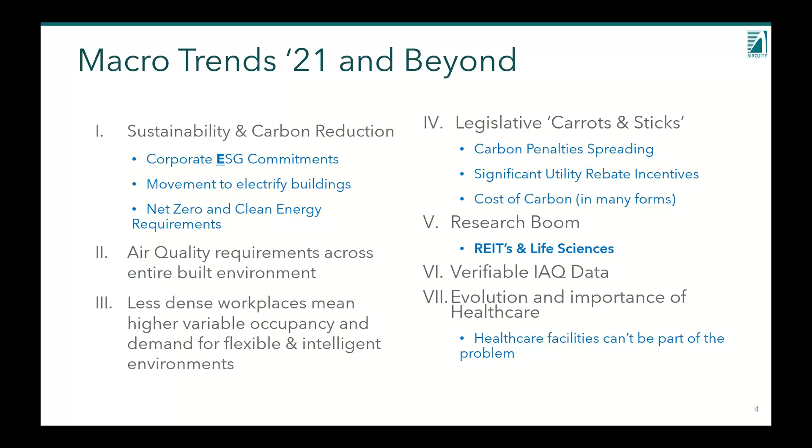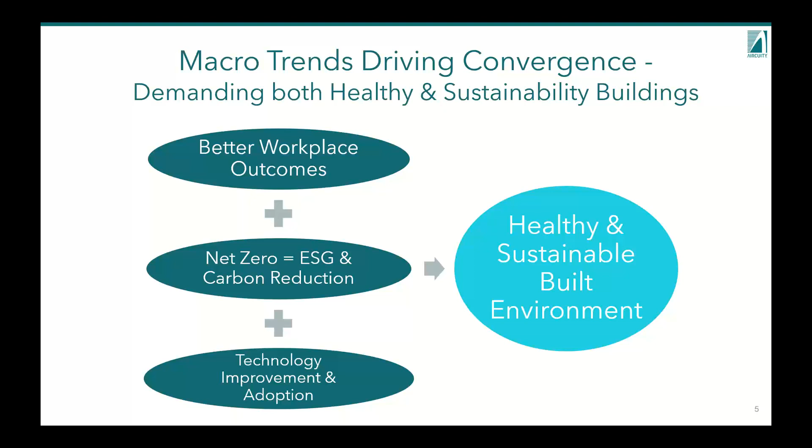So these trends really support the rest of what we're going to talk about in this presentation today. And what all that looks like, in a condensed format, is really a requirement for better workplace outcomes in terms of health, productivity, and wellness, plus being able to do that in a net zero, ESG carbon neutral environment, and then the emergence of new technology adopted to the built environment to meet the requirement of healthy and sustainable buildings, schools, workplaces, and research spaces, because all of them are just as equally important and focused on this.

So what does this look like in action? This is going to drive, and it already is starting to drive, a significant transformation in the built environment. And the one thing it's most akin to is probably electrification of cars. There was a report about 3 or 4 years ago that the combustion engine was going to be around till 2085, and the most recent report is that it will be gone completely in the mid 2030s. You're seeing, obviously on marketing and on the road, that transformation happened much more rapidly.

I think the same thing is going to be happening to the built environment. Net zero is going to become a requirement, and we're going to have to do that through adopting these new technologies. I remain extremely bullish on this front, really positive, because we've personally been involved in dozens of net zero projects around the world, and we've seen these buildings operate for a long period of time and do so very successfully. So we know the technology is there, we know the engineering and ability to do this is there, and it's really just about much wider adoption of these proven concepts and technologies.

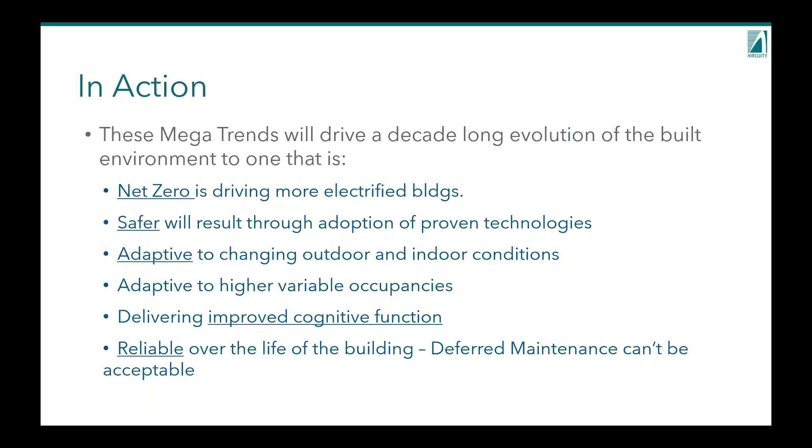The last bullet here is you just really need to make these buildings reliable over the life of the building. As we know, buildings don't go anywhere. They're often there for 50 to 80 years, and we can't allow deferred maintenance with these new technologies to be acceptable if they're also going to provide the health and wellness that they're now being required to.

So a couple of these concepts, like what is it about net zero? Well, if you include embedded carbon with the materials and such, it's in the mid-30s percent of all emissions that result, but 28% of them are just from the operations of buildings. So the world, meaning government, independent organizations, all sorts of different bodies and entities, are looking at the built environment as a major contributor to carbon emissions and something that absolutely has to be tackled.

HVAC and ventilation, as I said earlier, make up the vast majority of this. You're heating, you're cooling, and you're moving air through buildings. And if it's a 100% outside air environment like a lab or an OR, that can be as high as 60 to 70% of the total energy usage, depending on that building type.

One of the best results from managing ventilation more effectively is the mitigation of reheat. In many retrofit projects we see reheat almost completely go away, because you're not overcooling a space, supplying 55-degree supply air and then trying to reheat it back up for temperature. When you reduce the volume of air and manage it more effectively, you can really eliminate, not always entirely, but dramatically decrease the amount of reheat used in these buildings.

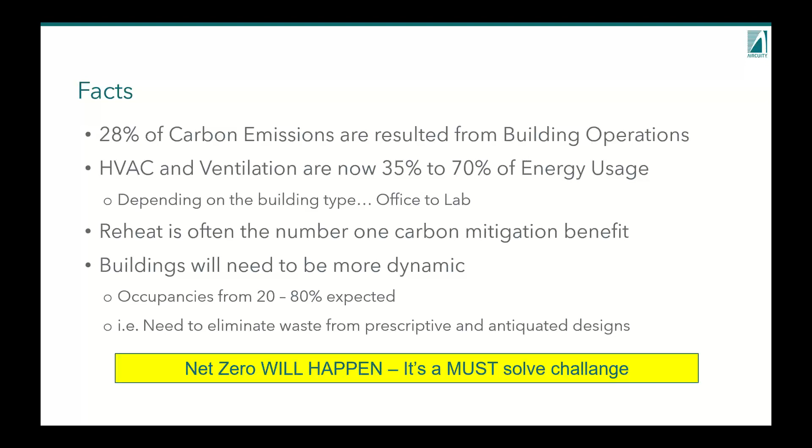So these two things go hand in hand, and it's extremely important to look at them as a total system, not just as an individual ECM or facility improvement measure. And then lastly, building occupancy and ventilation is going to be critical to manage, because occupancy is going to be much more variable with this hybrid work world we're migrating to, and in some industries that's here to stay. This is a must-solve challenge for our industry, and it's why I started by saying I think it's a really exciting time. I think it's going to be a lot of work, and we should all feel good about tackling these new challenges.

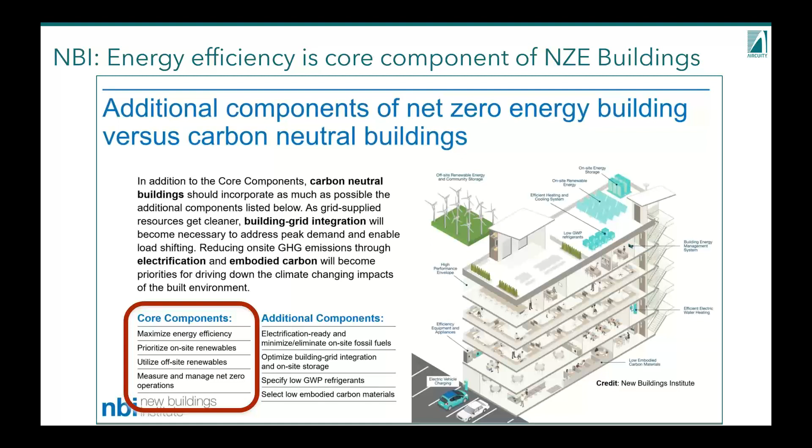Hopefully, because of ESG pressures, more of our organizations will put the proper resources toward tackling these challenges. As I mentioned, energy efficiency is a core component of net zero buildings. This is from the New Buildings Institute, and it really talks about maximizing energy efficiency first and foremost, prioritizing your on-site renewables, utilizing off-site renewables, and then measuring and managing to net zero operations.

Again, this concept of making buildings more intelligent and smarter so the systems can be maintained reliably over the life of the building, giving you the results of a healthy and safe environment—this is going to be an ongoing and very important concept. Moving to the health of the environment, the World Health Organization just published a report, and we've got connections to it on our website. It's being talked about a lot more. The key point of the next couple of slides is that the cost-effect studies were originally focused on CO2, and obviously the carbon reduction movement is about reducing carbon.

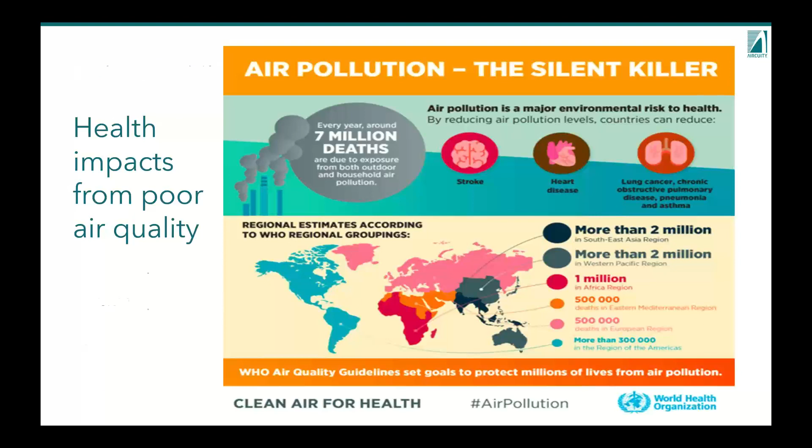But we're now also really seeing, both from COVID and this report, that small particles have a major impact on our health, and it's a very pervasive problem, both outdoors and indoors, that needs to be measured and managed more effectively going forward. We're very happy to see WHO and other organizations like IWBI get standards in place about what good indoor air quality looks like, and what level of small particles—this is 2.5 microns.

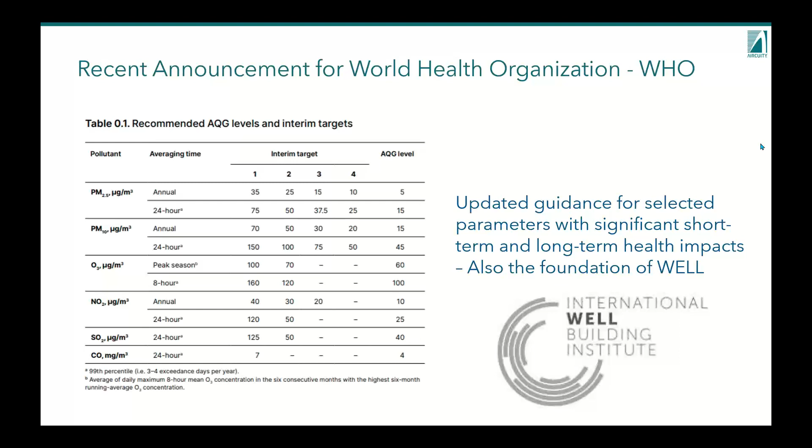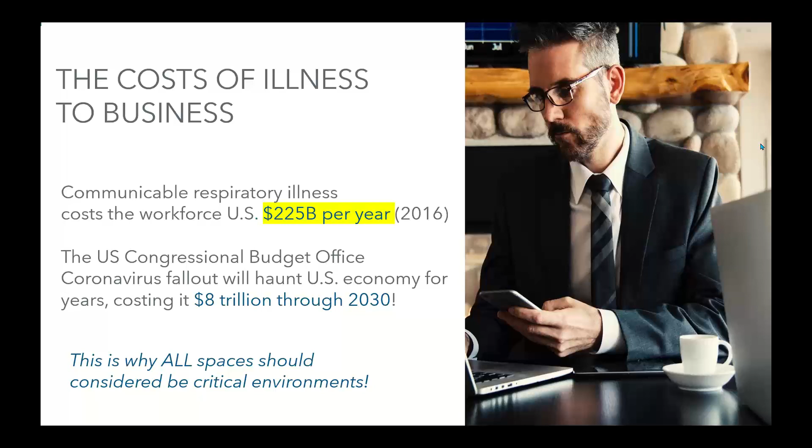Buildings are being cleaned more often. We all need to make sure our buildings are healthy, not just from a particle and CO2 perspective, but also from a harmful gases standpoint. This cost is real, and it's what's driving this movement. I think we all know this intuitively now after what happened with COVID—when buildings are part of the problem and not the solution, they're not safe places to go, and the cost is absolutely astronomical to the economy and to the organizations we all live and work in.

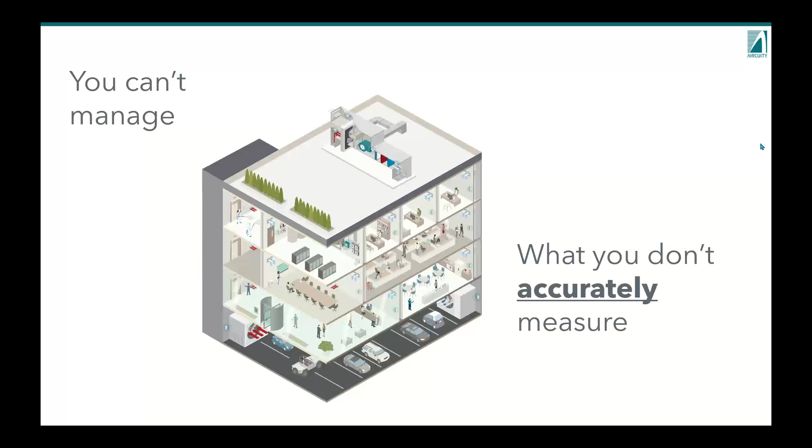So with that—this is a saying we have, but I think it's just as true in life and good engineering—you can't manage what you don't accurately measure. I think that's an important concept to get across. It's always been a challenge in the built environment, especially with things like TVOCs or particulates, which aren't traditional measurements done very well in the building automation industry—stuff we've been doing for quite a long time.

You're also seeing a lot of our customers finding this: outdoor air conditions are changing, unfortunately, right before our eyes. We all witnessed the fires in Europe, the fires in Australia—seems like one or two a year now on the West Coast, and a lot of those are now spreading across the country. We had customers in the Midwest and even on the East Coast calling, asking about particulate measurements outside that spiked from fires all the way out in Washington State.

We're seeing really more customers wanting to understand what air they're actually bringing in, and then how effective their air handling units and filtration strategies and maybe other air cleaning strategies are working. If you don't accurately measure that, you don't know where your baseline is or how effectively you're doing that.

The last part of this is an emerging and evolving field that we've experienced quite a bit over our history: when you look at indoor air quality, it goes well beyond facilities typically. We have environmental health and safety, infectious control, animal care professionals, researchers, PIs - principal investigators - all sorts of people wanting to understand and get access to air quality data. Many times they want easier, more digestible data and analytics for what they're concerned about: what was the level of particles in this space, how long did it last, did it get cleaned out - all those kind of things. So we try to provide that.

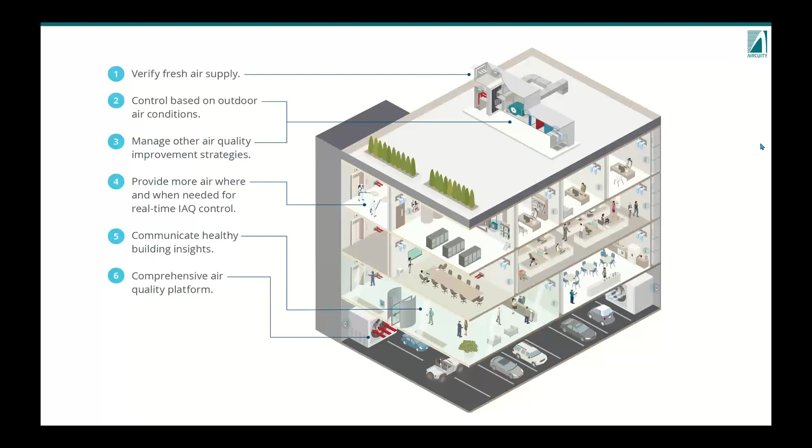So you're seeing more air quality data more pervasively displayed and utilized in the built environment.

I'll go quickly through this - we have a lot of information on our website. This is the commercial part of the presentation, but I've been at Aircuity for a long time. I came here because I believe in the concept, having come from the building automation industry.

The idea was to accurately measure indoor air quality and dynamically control ventilation to optimize both energy efficiency and health, wellness and safety. It's often misconstrued - most times we're actually providing more air where and when needed when there's an event. It beats a prescriptive approach because you're getting more efficient when you don't need all that air, and you're getting much better safety and performance of the system when you do need it. You also get all the analytics from the system that can help you with fault detection diagnostics, fixing problems much more quickly and accurately.

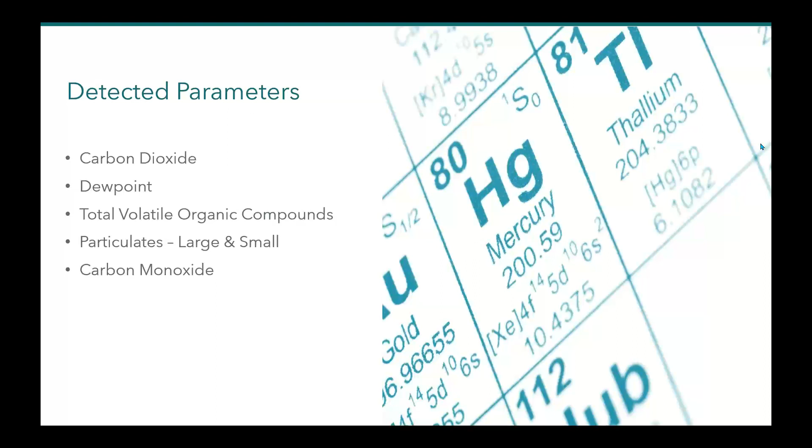So the platform measures carbon dioxide, dew point, TVOCs - total volatile organic compounds. We do that through two methods: one, which is a much more industrial grade approach, is a photoionization detector. We look at particulates, large and small, and we go all the way down to 0.3, and we're going to be improving even on that in the coming year. And then obviously carbon monoxide as well.

The platform looks like this - it's a multiplex sampling platform. What you should know is that this allows us to do this very accurately, very cost effectively over the life of the building. If you look at a life cycle cost approach, this is going to win hands down compared to calibrating and maintaining those types of sensors out in your space, which most people can't effectively do over time. So this is a life cycle cost solution approach.

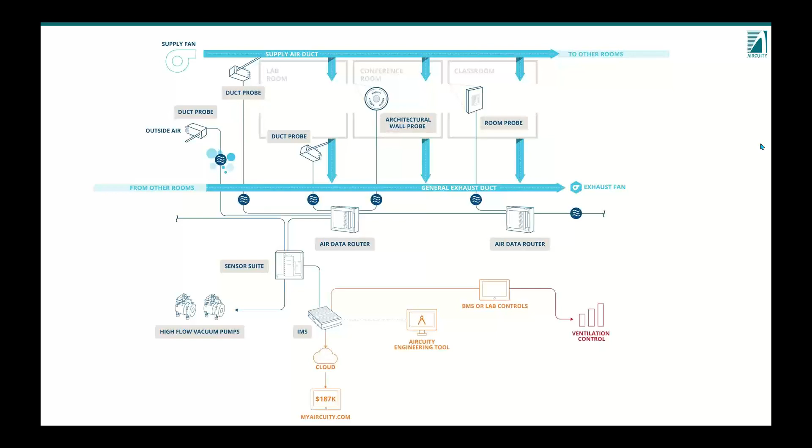And then we actually take that data, report it to the cloud for repurposing to all those constituents I mentioned earlier, and we also integrate that to the building automation system for dynamic control.

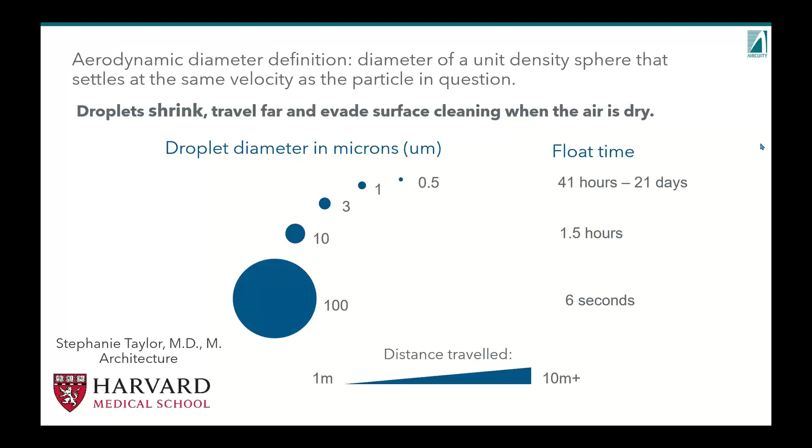So the lessons we've learned are that particulates are very important. This is a slide from Dr. Stephanie Taylor, who's a distinguished ASHRAE lecturer - you may have had her speak at APA previously or at local regionals. She's an incredible presenter with a lot of data and experience on the effects of humidity and what happens to small particles and how long they last in the air at different humidity levels, and why it's so important to mitigate the amount of them in the space. What you find typically is that in this 40 to 60 range - she calls it 40 to 60 RH on her website - you see how much healthier and more effective the built environment is.

Now, knowing full well, as many of you do, that humidity is one of the most challenging things to control and manage in the built environment, I think with this knowledge it's really about knowing. We're not drawing a line in the sand saying you must maintain these levels and go to great expense to do so. It's really about knowing this dynamic and how we begin to change control strategies, balance occupancy levels, and all sorts of things we're talking to customers about - when you may have extreme dry periods like in the winter, and or high infection times or periods.

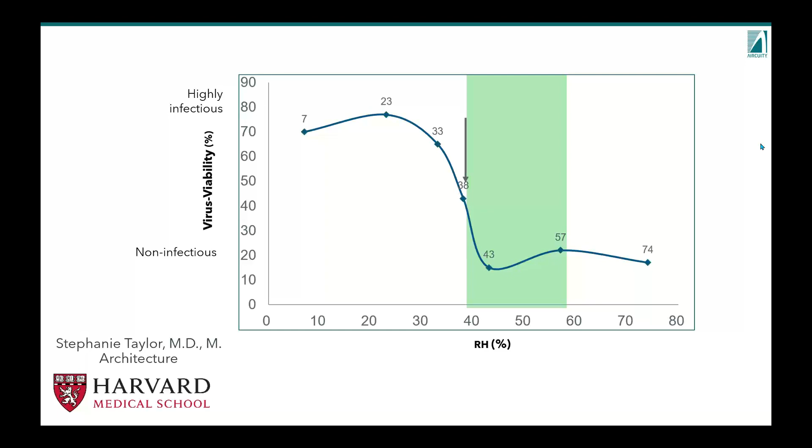So this is just relative humidity, and particulates are certainly a big part of what we learned from the whole COVID experience. The other thing we learned was filtration effectiveness is absolutely important.

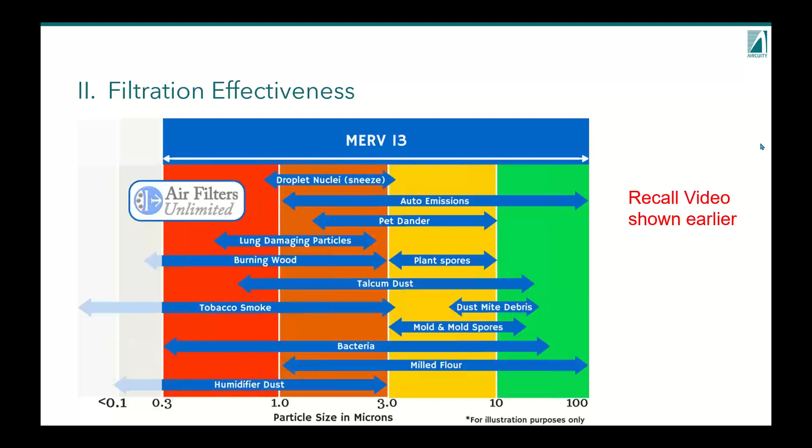ASHRAE and most of our customers have gone to increase to MERV 13 and above. One benefit of dynamically controlling ventilation is that as you increase filtration, you also affect your differential pressure. So to make that as efficient as possible, you want to balance that increased pressure with demand control ventilation, getting a much more efficient system overall while getting much better filtration effectiveness.

For a lot of our customers, we're also doing particulate measurement where all Aircuity systems have an outside air reference. Because we do differential measurement, we compare that to the supply air, the room air, etc. We really want to know what's coming into the building. We want to see if they have return air, what's coming back, and how effective that supply air is looking.

This is really where, if you're accurately measuring this, you'll know how effective your system is working. Is there filter bypass? Did you get a massive improvement when you upgraded filters? Can you change your filters based on actual performance versus time-based schedules? We've got customers doing all of the above.

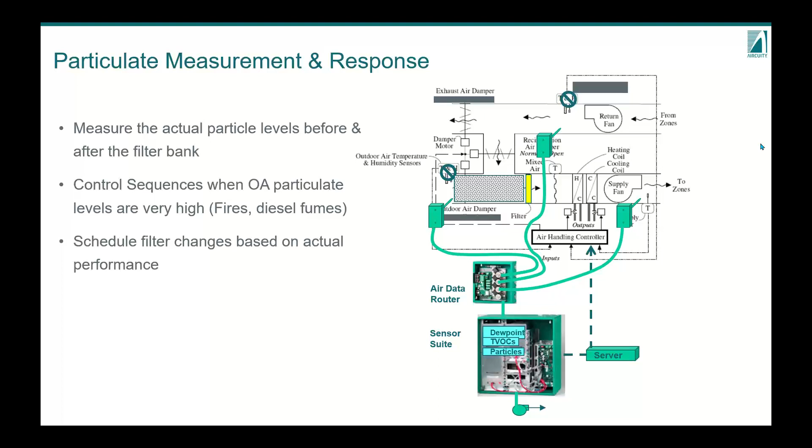It's really important to do this because we see a lot of project data where somebody might see a spike in a room, but that could be coming in through your actual system, through the supply air. So do you want to increase ventilation when the problem is actually in the outside air? This is a very good reason for establishing a system and control strategy, which is what Aircuity implements, really identifying where these problems exist and controlling for that.

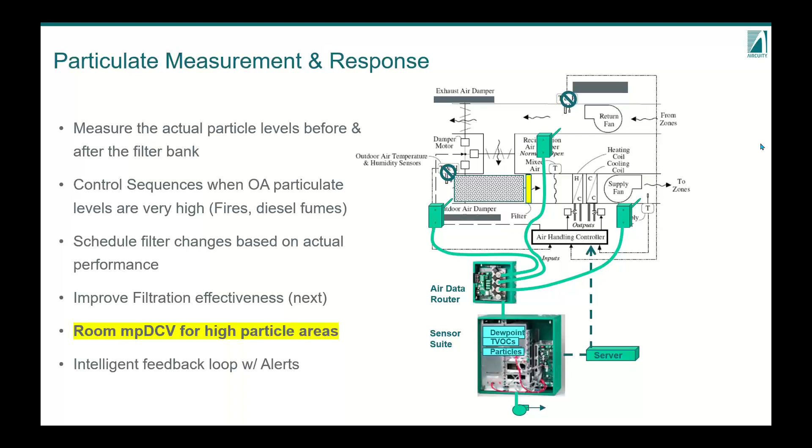That's where we build in intelligent feedback and alerts for customers. So the challenges that remain for us: relative humidity is going to continue to be interesting, and we'll have to evolve to more cost effectively and better control for that.

Are these other air quality improvement strategies and technologies that we're going to be deploying actually working? When and where do we provide more ventilation? And how effective is everything we're doing from a strategy perspective to provide healthy, safe working environments actually working?

The last point on this slide is something we've been saying for two years now, coming from the critical environment spaces. We know the strategies that work, and we know we can achieve both energy efficiency and much safer environments. One of our clients, University of California, Irvine, has just reported they have almost twofold the lowest health safety incidents in the entire UC system, and they've been implementing smart labs for over 13 years.

By education, it's not just an Aircuity thing or managing ventilation, it's really a cultural effort to want to know the data, understand how the systems are performing, implement these technologies, and watch them work over a long period of time. The energy performance characteristics are incredible, but the impact and cost benefit for health and safety is absolutely off the charts for them.

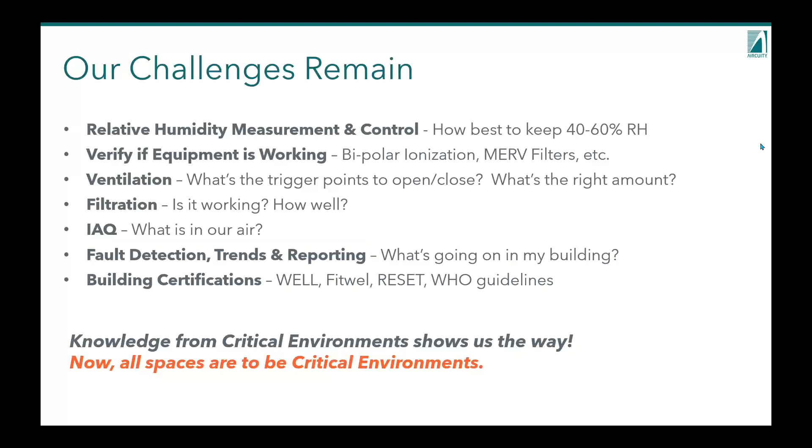If we begin to think about all spaces in critical environments and implement these technologies, it can be done, and done cost effectively, even in a net zero environment, providing healthy and safe conditions all the way down to our schools for kids.

UCI is a great case study. They set out to reduce their energy by 50% across 17 lab buildings. They actually achieved 61% energy reduction, and they've estimated total savings to the campus to be over $100 million over the life of this period. That's not energy cost only, that's energy, diversity savings, and sizing of equipment.

They totalized all of the gains they've got from this Smart Labs program. They were honored by the DOE, and they've since educated probably 500 to 1,000 customers around the globe on what they've been able to accomplish there. Phil, I was there on day one, and I feel very privileged to have watched that success story.

And so when you see that project, let's get out of this slide here. Yeah, oh boy, click on it again.

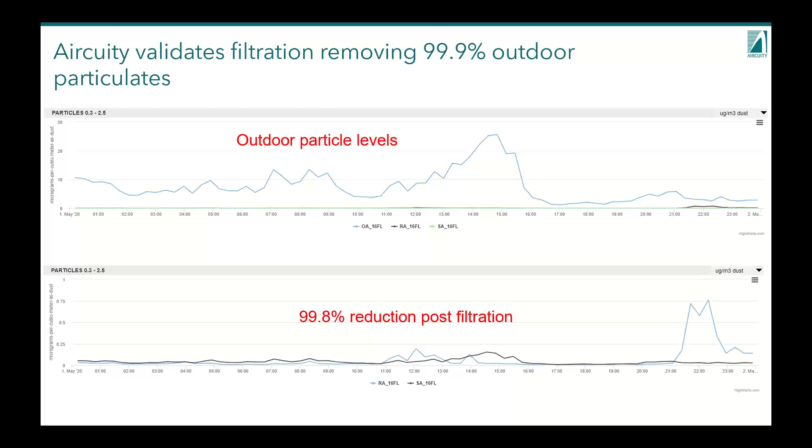And at the end of the day, they also look at that example I was giving you earlier about carefully looking at outside air particles, because they are in New York City and it can be higher there, and how effective their filtration is actually working, and are they managing to the levels they want to. This particular project was well under a 2-year payback.

One of the cornerstones of all these projects, that hopefully resonates with everyone on this call, is that this customer was able to take a project that had a really good rate of return, also get a new control system, a new exhaust fan, rebalance the building, and also recommission all the systems in the building. All turned into about a $7.2 million project, well under 2-year payback, and in this case, a very significant utility rebate incentive.

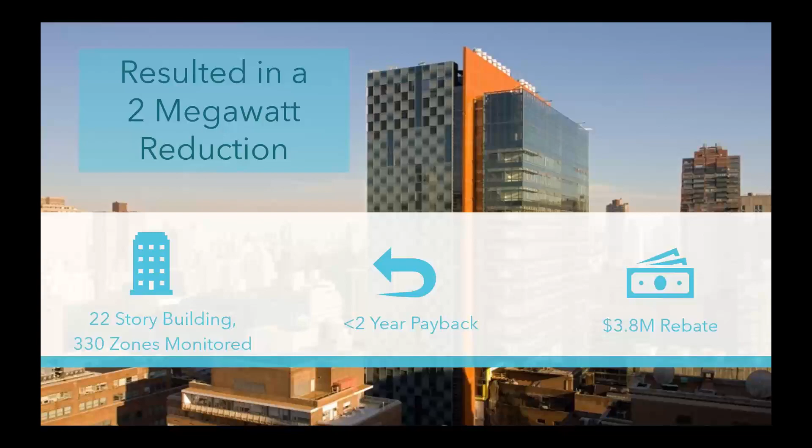What's incredible is that it resulted in a 2 megawatt reduction across this building. And that's why Memorial Sloan Kettering has done all ventilation management across their whole entire campus.

So far you may say, okay, it works great at UCI, and I see Apple, you may say, oh, well they've got a lot of money. I'll say this, but trust me, every customer is just as concerned with cost and savings as the next.

I will highlight, because we are Apple, you can get a little more technical. A lot of the schools are utilizing DOAS as well, dedicated outside air handling systems, and many times they're coupling that with a VRF system. It's a different design concept for a healthier, more energy efficient school.

As you look to a path of net zero, the takeaway should be that as buildings become more electrified, net zero doesn't necessarily directly mean electric buildings. But I just came back from an I2SL meeting 2 weeks ago, and more than 50% of the architect and engineering programs, way more, were talking about net zero and the movement towards electrification of buildings.

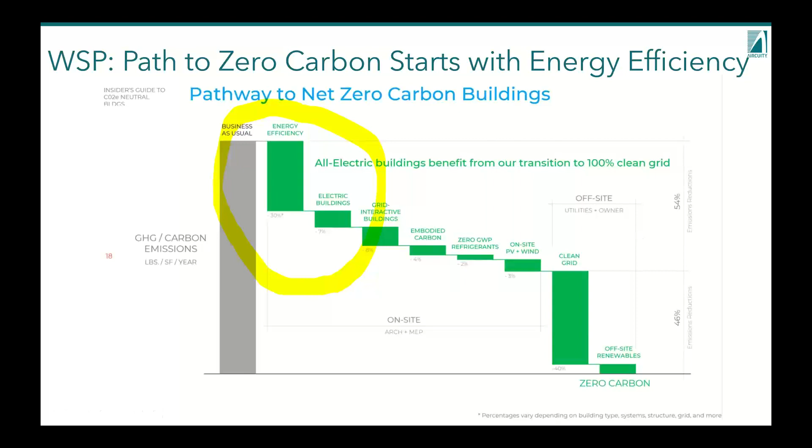And if they're not deploying it today, they believe they're going to have to do it in the next 5 or 10 years or so. This is a really good roadmap as it looks into, it all starts with getting buildings as energy efficient as possible, because that's going to reduce cost all the way down this strategy matrix, and provide significant offset for supply side strategies like clean energy.

So I'm going to turn this over to Zach. He's the keynote speaker, as I mentioned, and it's a real case study. I think you're going to find it incredibly compelling, as many of our customers have, and hopefully you'll see more of in the next presentation.

It's about committing, identifying an opportunity or a project, and most importantly, assessing the macro opportunity. A lot of times it takes higher buy-in from the C-suite and above.

When you start to look at the total impact for health, wellness, efficiency, everything that people are trying to accomplish, it garners the attention of senior leadership in your organizations, and it's well worth it, societally, for what we're trying to solve.

The other benefit is you can typically address a lot of deferred maintenance when you execute these projects and programs. You want to leverage utility incentives where possible, and also leverage the very low cost of capital today, and other air-quality-as-a-service programs where you don't have to have capital outlay. You can do all this at no upfront cost, and even make it a positive cash flow program.

Then you implement a project, communicate that success, and rinse and repeat. That's what University of Pennsylvania is now doing in 30 buildings and going, and UCI is up to close to 23 or 24. It's what these customers do - they have a really good strategy, and they really get after executing it.

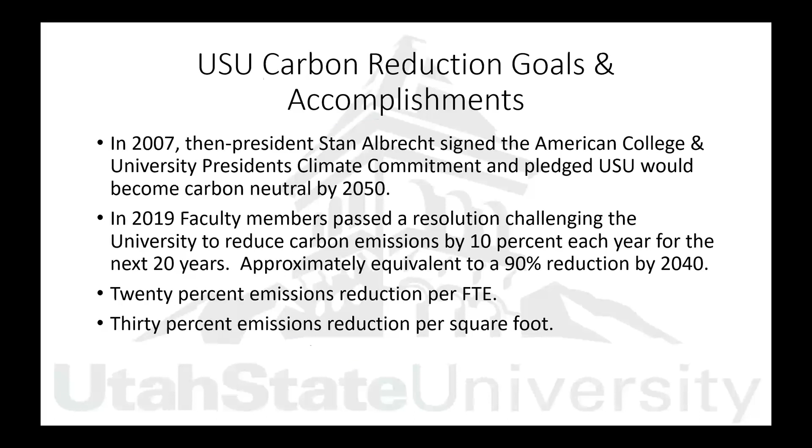In 2019, our faculty senate passed a resolution challenging the university to increase the rate at which we become carbon neutral. We have a lot of obstacles to overcome, one being that our campus continues to grow - more students, more buildings. But we've seen substantial improvements: we've reduced emissions by 20% per full-time student, and 30% per square foot. So we're seeing great reductions, but it is an obstacle, and I'm sure everyone on this call is facing the same challenges.

Looking at this pie chart, it gives a breakdown of where the university's carbon emissions are coming from. 26% are tied to transportation, whether directly funded transportation to the university or faculty, staff, and student commuting. But the biggest chunk, which as a facilities organization we are most focused on, is the 63% tied to buildings we operate and maintain - emissions connected to heating, cooling, ventilating, emergency generator diesel fuel, and all of those things. So we have a substantial part in this challenge we're working to overcome.

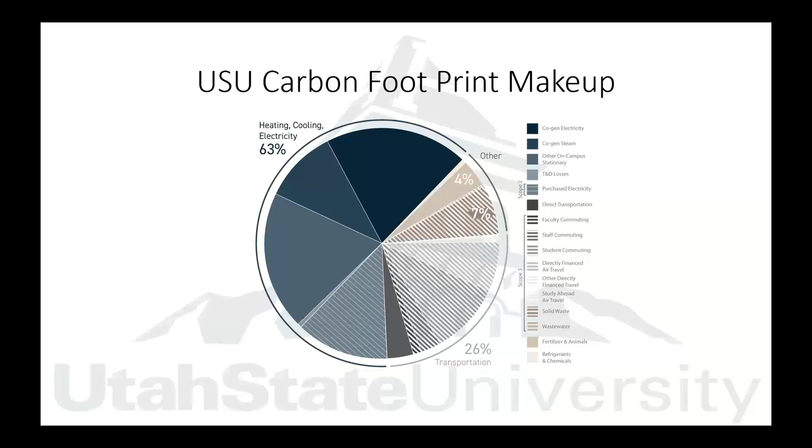Obviously the buildings are our focus and the biggest thing we can do as a facilities organization to, as Dan talked about, focus on energy efficiency. I'm sure many on the webinar are doing similar things or have completed these tasks, but the strategies we've been focusing on are developing more renewable energy resources.

A big challenge on our campus is our central energy plant, which is heavily dependent on natural gas, gas turbine, and steam distribution. We're also working on transportation, carbon offsets, and educating students, faculty, and staff to make sure they understand their responsibility in this effort.

We're on the final phase of completing a campus-wide LED conversion. We're a land grant institution with campuses across the state of Utah, and we're finishing up converting all of our campuses and buildings to LED - we're on the tail end of that. Last I checked, we had replaced about 150,000 4-foot LED T8s.

But we're most interested today in our discussion on building energy and operational efficiencies that can be gained through how we operate our buildings. On the left, I've shown the typical EUIs of about a dozen of our laboratory buildings, and on the right you'll see the EUIs for a typical office or classroom building.

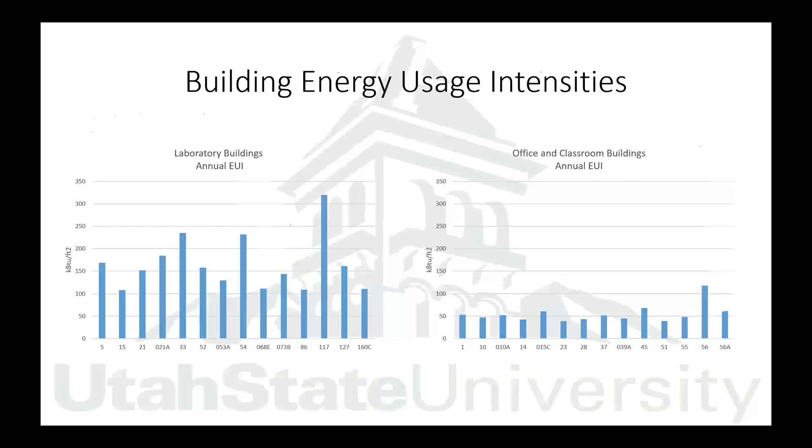As energy managers, there's so much opportunity. Small changes we make in the operation of these buildings can have a substantial impact, and sometimes that's good and bad—we can make changes that have negative impacts as well. But where these systems run 24/7, 365 days a year, there's just a lot of energy used.

So we've really been focused on coming up with strategies to improve their efficiencies. In the past, we looked at making sure the runaround heat recovery loops are working properly, but really these are only gains of small numbers, because the efficiency of a runaround loop, even running properly, is only 40%, and you can't recapture the fan energy used to move air through the building.

Other efforts in our laboratory buildings have been working with our environmental health and safety office. They've allowed us, in only certain labs, to use occupancy sensors and reduce air changes down to 4. That's typically in teaching labs, so it's not a very high quantity of labs we've been able to do that for.

The next effort to bring these laboratory EUIs down and work towards net zero buildings is evaluating non-lab spaces connected to lab single-pass systems. When these systems get set up, the controls contractors put the minimum ventilation for a VAV box at 20 to 30%. That works fine and is probably proper for a mixed air system, but when you have 100% outside air, that's not required by ASHRAE 62.

So we've spent a lot of time making sure those ventilation rates are proper, and are often able to set office spaces tied to 100% outside air units down to the minimum VAV controllable flow rate. Other strategies have looked at exhaust air, trying to reduce fan energy associated with bypass air to get stack velocities up to the 3,000 feet per minute required by ANSI Z9.5.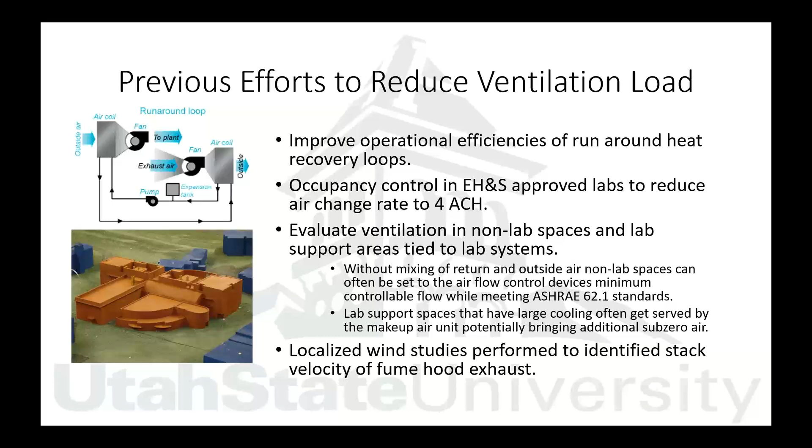So that's kind of where we got to, and we just felt like we were not getting to the real root of energy usage. As Dan talked about, we see how much energy is involved with these 100% outside air units, and there's a prescribed method of 6 to 8 to 12 air changes an hour depending on the type of lab. We always suspected we were probably over-ventilating these spaces.

But we didn't have any extensive data to show that. And if we did have data, it would be a static, single snapshot in time, and we really couldn't justify saying we saw safe air quality for a given period and that it would be safe under all scenarios if we lowered the air changes.

So we were fortunate enough to receive a grant from Edwards Mother Earth Foundation, which helped us put together a pilot project where we initially planned to put the air quality system in an existing lab building, our College of Agriculture, and a building under substantial remodel, our Biology and Natural Resources building. But we were also fortunate to get funding for a third building, our Life Sciences building. Altogether, we're monitoring about 56,000 square feet of lab space.

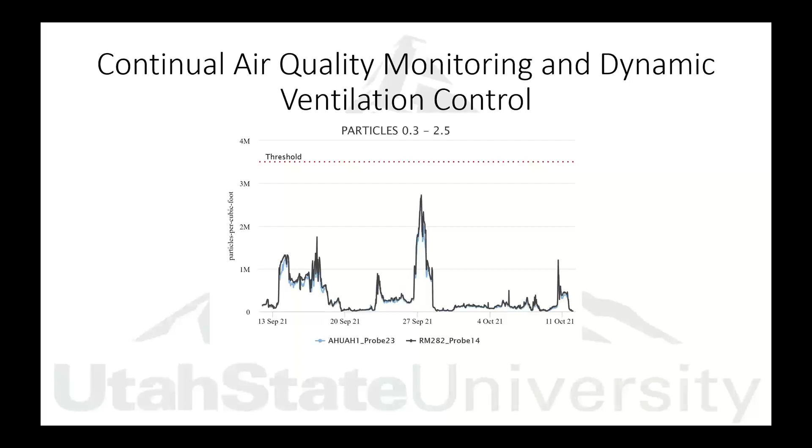As we carry that forward, our hope is that we can expand that to the other 400,000 to 500,000 square feet of labs that we operate and maintain in the buildings we are responsible for. This could potentially be a 5,000 to 7,000 metric ton reduction, which equates to somewhere around 7 to 9% of the carbon that the university emits. We are very excited to gather the data over this next year, and would love to have an opportunity to present as we have more data.

Going forward, we are already working with our EH&S to get them access to the Aircuity system, so they can monitor and track the air quality and see the levels at which the different labs are at. We also are anxious to start looking at monitoring the exhaust system, so we can potentially use the concentration of any chemicals in the exhaust stream to adjust and reduce the exhaust stack velocity.

Lastly, once we have a good case study, which we are starting to develop right now, we'll take this to the university's administration and try to expand this to other existing buildings on campus, and develop a standard that new laboratory buildings are built with an air monitoring system, so that we can provide the ventilation that we need. Because with these laboratory buildings, there's not an easy way to have them be net zero, and the only way I see that's possible is by only ventilating the spaces according to the needs.